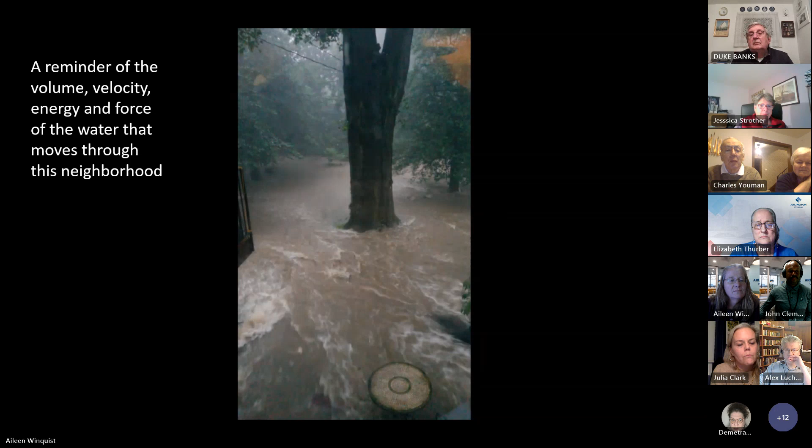And so with that, I will turn it over to John. And again, he's going to go over some of the information about the specific demolition project and some of the site-specific plans. So, John. Thank you, Aileen.

Once again, I'm John Clemons. If you guys missed that in the beginning, I will be one of the project managers for this site, for this demo site. And to jump right in, we're going to go with the phases of the demolition project. Phase 1 is pretty much complete. We have plan developed, and it is in the permitting process. The utility disconnections have been made.

This phase 2 will be physically on the site, with the contractor doing the abatement of hazardous materials, and then the removal of the structure, followed by seeding of the footprint of the house.

So with the contractor scheduling, that is based on the county's contractor that we have secured their timeline. So right now we don't have a place in their schedule just yet. We're really shooting for March, but it may linger for 2 to 3 weeks. But we really want to be able to pull everything down within the planting season of spring.

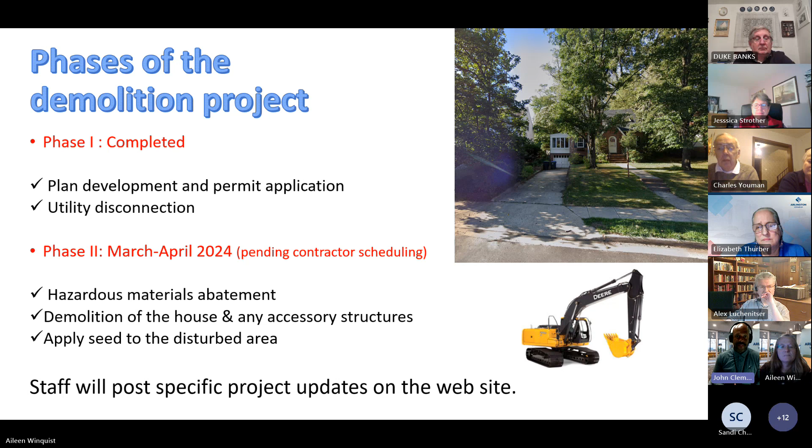I just went over a little bit of that. Again, the LDA permit as well as the demo permit have been applied for and are being transferred over to the contractor. Just some internal Arlington County processes that we are in now.

The utility disconnections have been completed for this property. The hazardous material abatement will take place right before demolition. There is a state mandated 20-day notification period.

That would all be managed by the state. Once we get to that scheduling for the contractor, and the contractor's consulting, it's either Goal Engineer Inc. or Goal Consulting, but once they have a schedule ready for us, they will then start that 20-day notification to the state, and they will have inspectors. The state will send out inspectors for abatement and to make sure that there are no particulates released in the air and that there's not a hazard for the surrounding properties while this property is being abated.

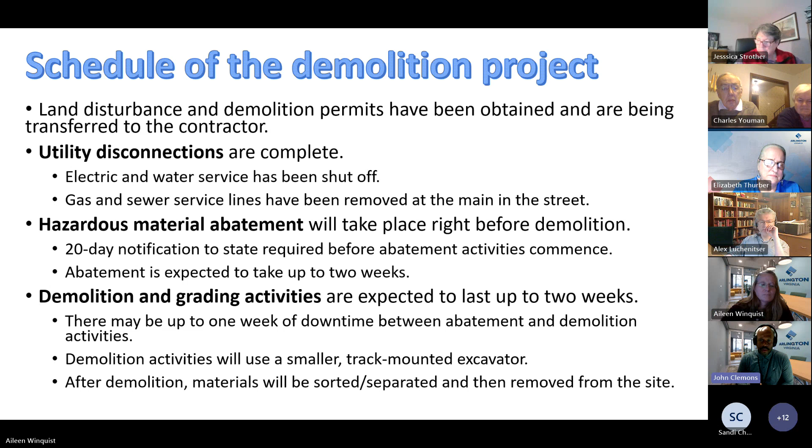And again, as I've mentioned, Aileen, we can go to the next slide. Sorry.

As I mentioned, that schedule will be adjusted due to weather conditions and or subcontractor availability. Once we get the schedule, we'll be able to put more information on the website about exact dates and times. But as of right now, we're still trying to figure out their queue of work and where they can fit this property in their demolition.

I did just see a question pop up about existing fencing. Yes, we have no plans to remove any fencing, either shared or in the front of the property, or in the back of the property. There is no front fencing, so that is to stay and remain. We will not be removing any fencing.

During demolition, signs will be posted, but we ask you to be cognizant of parking right in front of the property. There will be heavy machinery and trucks going into the property. The actual physical demolition shouldn't take more than 2 to 3 days, so it shouldn't be a longer nuisance than most construction or demolition projects. But there will be a pause in front of the property for access, for contractors to access and leave the site.

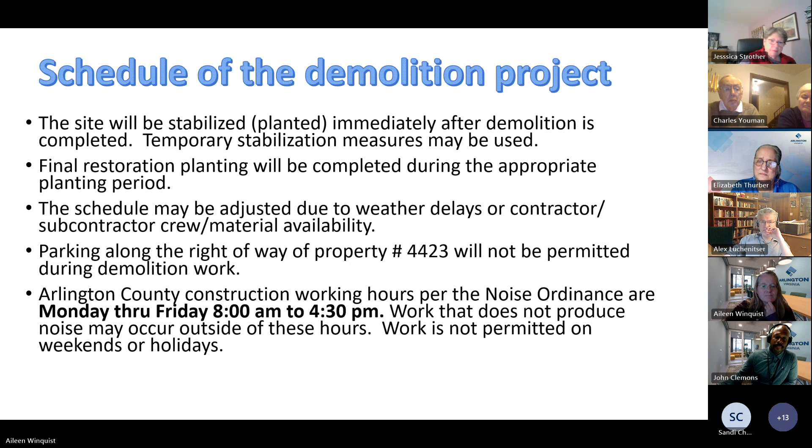I think we had another question about fencing, which maybe we can get to as we get into the plans for the property. Why is fencing not being removed?

I can answer that. We're not removing the fencing on the properties because many times, the fences are along the perimeter and other people sort of use the fence to keep things in - in other words, they fence in more than one property. They're on a shared boundary line. If we were to take the fence down, that might leave the other property unfenced, and there were people who expressed concern about dogs, pets, and kids getting out of the yard. So for now, we're leaving the fences in place.

Thank you, Liz. Here's a bit more information about the hazardous material abatement. A survey was done last September, and there are asbestos containing materials present - in doorway jambs and window caulking, as well as vinyl flooring, which is typically in the basement of these older homes. Lead-based paints were also present.

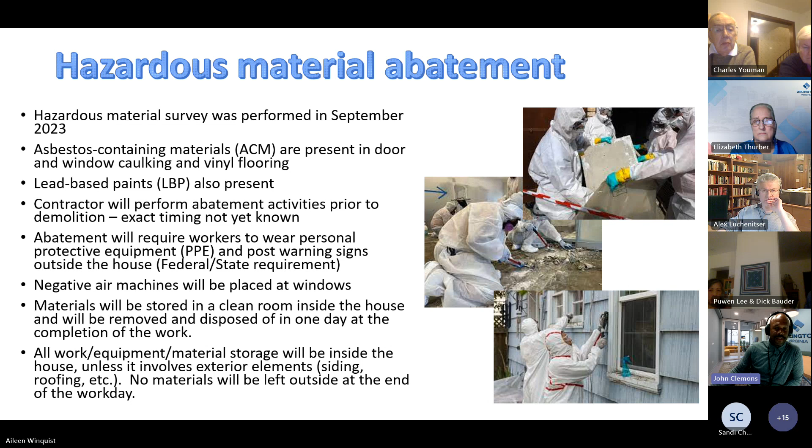What to expect during construction - this is for the neighboring properties. There will be some inconveniences such as dust, noise, and debris, but dust control measures and a silt fence will be installed around the property areas. Debris will stay within the site. The construction entrance will house the dumpster to remove the structure directly into the dumpster and then off the site.

There will be temporary parking restrictions, as I mentioned earlier, and increased traffic due to contractors and subcontractors doing their portion of demolition. There will be sidewalk detours for safety, since there will be heavy machinery in use and not everyone has a hard hat, so we ask that you cross the street if you need to walk past the property during demo. There will be a bunch of folks walking around the site, trying to make sure we get this down and done as quietly and quickly as possible.

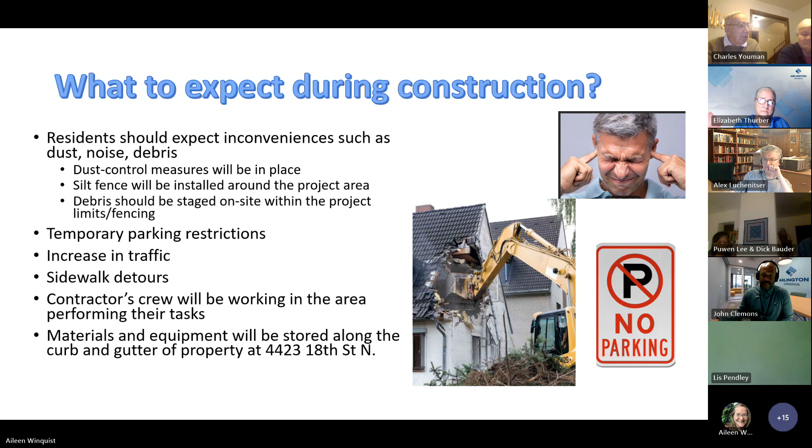And next slide, this will go to the earlier question.

This image also shows our silt fence, in the top right corner at the 1 o'clock position. This will go along our limits of work. We do not plan to disturb the northeast corner of the property. Everything we need to pull out is going to be done just to the west of that sight line. Existing fences along the north, east and west property lines are to remain.

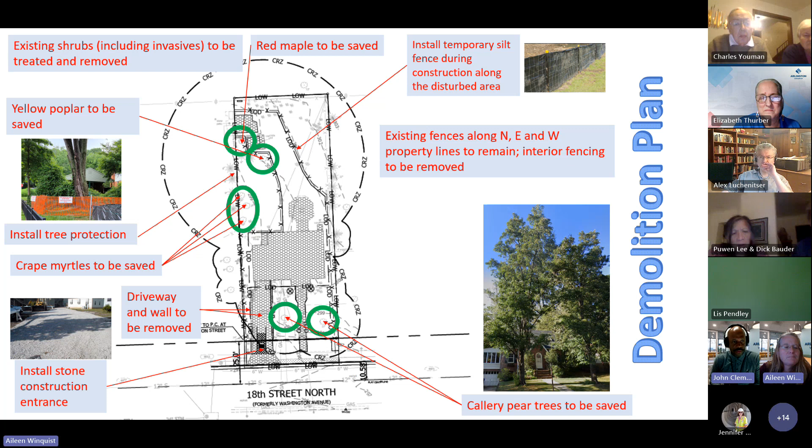As Aileen just pointed out, the red arrow is pointing to that hatch through the middle of the top end of the site. That will be the root protection matting, and there will be root protection matting in the front as well for any of the light to heavy machinery used on site to demo the property. This will protect off-site roots as well as the trees on site. It's probably 4 to 6 inches, topped with mulch to prevent crushing of roots at the ends and the base of trees. It has been approved by our urban forester and that department, and has been very successful in most parts of demolition, especially with light to mid machinery.

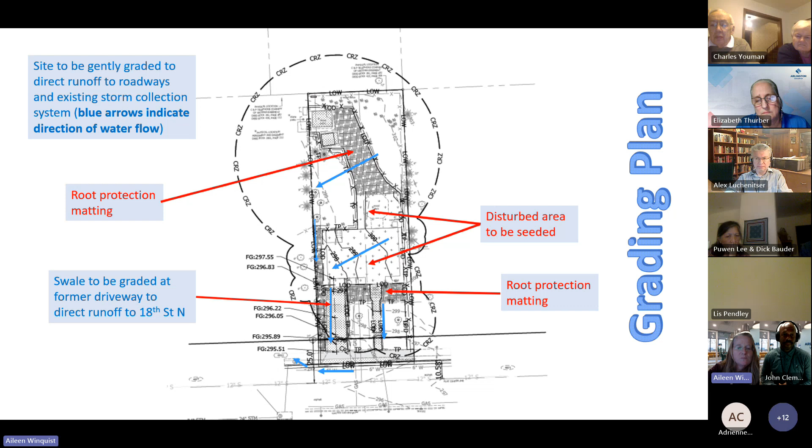I think someone has her hand up. I thought she was just asking the question about the driveway. Is your hand still up, or do you want to put it down, or do you have a question? No, hands down, you answered our question. Okay, great, thank you. I know sometimes the hands don't go back down, they just get stuck.

Okay, go ahead John. We'll jump into the planting plan. This is just an overview or aerial view of what it'll look like afterwards. On the left-hand side, the existing conditions show the structure. On the right-hand side, pretty much where the structure was is where the planting plan and seeding will be done, and that'll be the extent of the natural seeding planting, which I'll show in the next slide.

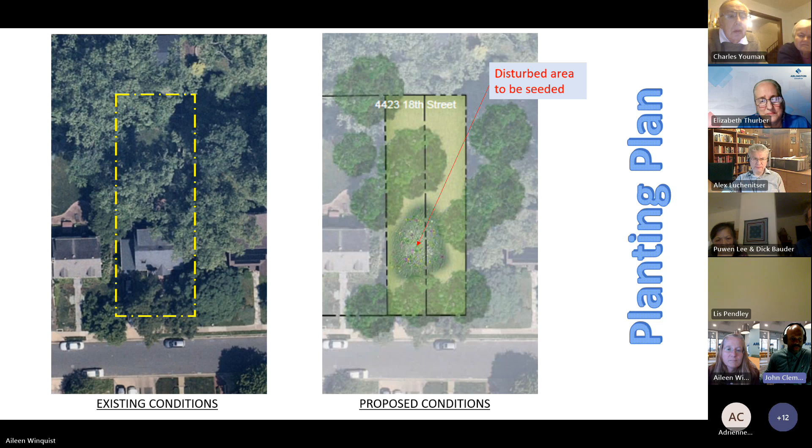Here is the natural local seed mix that was developed by our landscape architect and the UFA department. We have a custom seed mix with 12 different species within it. I'm not sure exactly how much of each will be prevalent, but this is the mix we'll have. This will only be in the area of the existing footprint—not the entire length and width of the site.

This will only be in the footprint of the house and some of the back patio area that was impervious prior to demo. As stated, the site will be maintained by the county contractors, with mowing every two weeks during the growing season, roughly March through October, and snow removal from sidewalks during the winter season. Leaf removal is not required through the county ordinance; however, during late-season mows, most of the leaves should be mulched on site and decay there.

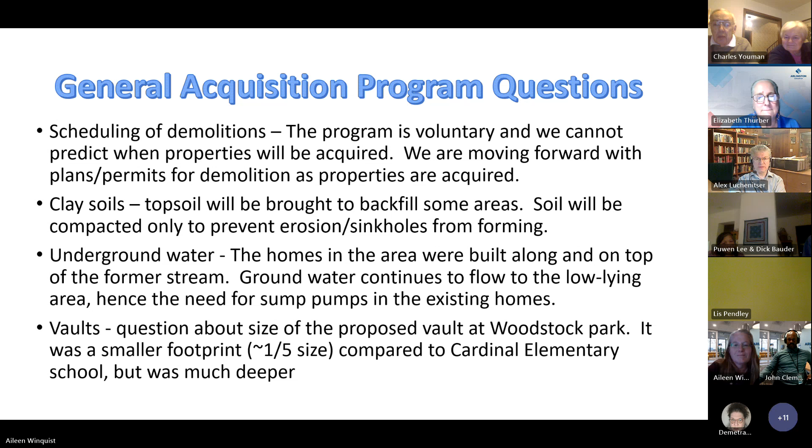Okay, and I think we talked about these topics as well—the longer term plan to develop a more consolidated landscape design as we see which properties we'll be acquiring, and the connection and layout there. So we've heard that request, and also the comments about leaves and concerns about leaves. That's something Lis and Demetra had talked about, looking for a better contract for this maintenance work.

I do want to point out that leaves are not clogging the drains in this area. We have had them inspected after different storms, and we regularly inspect them. The issue isn't really leaves blocking these inlets, it's capacity and other issues. But if you do see leaves blocking a line, there's a queue alert, there's a request online, and you can call, and our crews will come check it out. If they think it's full of leaves, they'll vacuum it out.

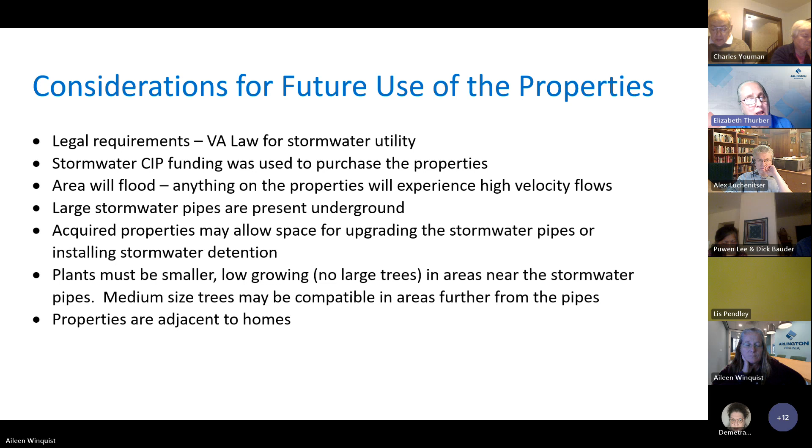Also, because there are pipes there, our capacity study and stormwater master plan indicates there are capacity issues in the stormwater pipes running through here, and it would benefit probably to have them expanded. So we need space to do that—space for the actual pipelines if that's what we eventually do, or space for contractors and heavy equipment because of the size of these pipes.

There are some pictures we're talking about—that's only a 5-foot diameter pipe in that one photograph, so there's a lot of space needed. We needed a 30-foot wide swath of area just to get the equipment moving up and down in the area. So we don't want to plant trees where we know we're going to be doing work on pipelines.

Also, if you're putting in underground detention to hold water to mitigate flooding, again there's a footprint you have to have, and you need space around the vault and actually on the vault. So there are limitations on what can be done when you install this kind of infrastructure. All of that has to be considered for the future uses of the parcels.

None of these things are off the table at this time. Nobody has said we're not going to upsize existing pipes, and nobody has said we're not going to put an underground detention tank there. So a lot of things are on the table, none of them have been crossed off the list yet, and we need to be cognizant of that before we start planting lots of trees and things like that. Those are the issues we're facing as we look at this.

The houses in this area are built right up against these pipelines. For the people on the project shown in the lower left, it was quite a nerve-wracking process having that level of construction going through there, and that was nowhere near enough to allow for the 100-year storm.

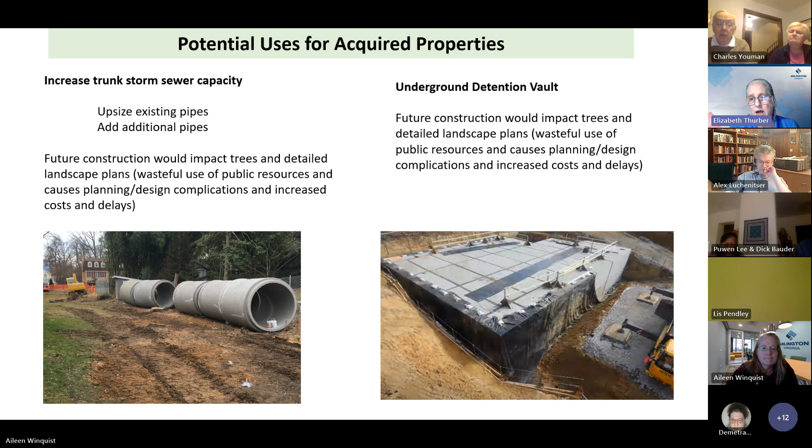So I don't know if we want to move to the next one. So then, people are talking about we want to use it as casual open space. Well, if you look at the information that Parks has about casual open space, they don't have any standards for that. It's never been done. They don't even have any standards or anything about that.

So what people need to understand is that some of the uses that may go along with what they call casual open space may have noise, lighting, parking implications, uses that you may not expect, like trails or other kinds of things that people want to put in a space.

So, again, our goal was to leave this program, these lots, these parcels, primarily as a flood mitigation area, an overland relief space.

And then people have... and I will say this, again, the Parks Department is not known for their marvelous flood mitigation efforts. Again, their mission is different than that. That's our mission, is to worry about flood mitigation. Their mission is parks and recreation. And so they have a different perspective than we have.

And we know that the area does in fact flood, so that has to be considered in anything that anybody wants to put there. And we are concerned over debris flows, which is, when you have these large storms and there's branches and benches and all that kind of thing, it can be a debris flow, and it can move from one area to the next and cause damage in another area.

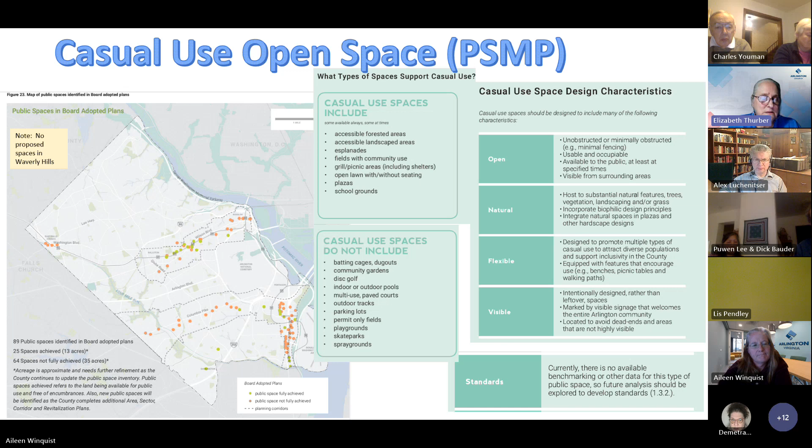Okay, so we tried to answer everybody's questions and explain all the constraints that we're working under, and people are trying to be creative and think outside of the box and do what's right for the neighborhood. We'll continue to do that.

I have a question for Demetra. Is that Adrienne? Yes, this is. Hi. There's been confusion about the phasing of the project. Initially, we were told it would be in 2 phases. Now we're being told it's 3 phases. Which is correct? You know, Adrienne, I'm not punting.

I think they're both correct. We had an initial kind of surge in early activity on the acquisition of properties. We do have internally, and unfortunately we are not able to share it publicly, the county attorney has told us that they don't want us releasing information that may adversely impact the marketability of properties. So we do have a whole map of the entire Spout Run watershed and the corridor with properties marked tier 1, tier 2, and tier 3, with tier 1 being the most important to solution finding and management of flooding.